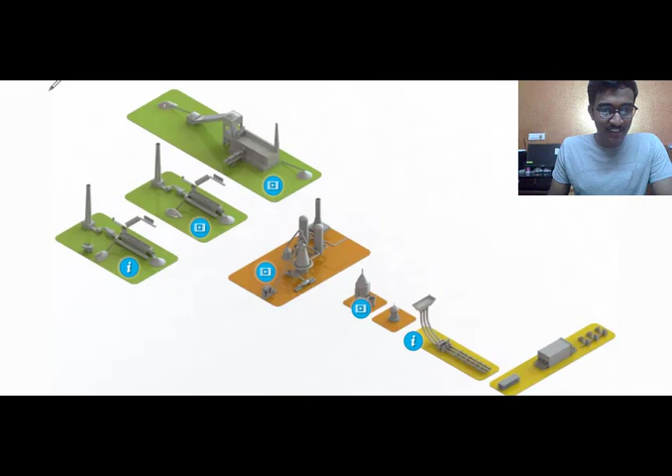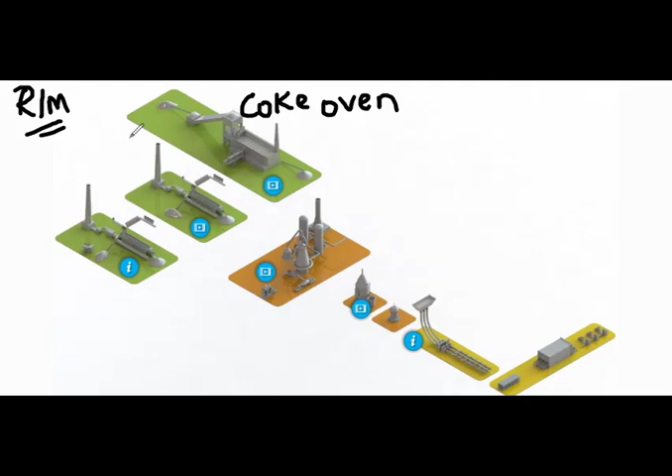Okay, it's an introduction, so let us go ahead. There will be raw material here, which will take coal, and the coal will be given to coke-oven batteries. Here we will have coke-oven batteries and mechanism, and here there will be fines. Fines can be converted as sinters and pellets. So this area is going to be sinter plant, and this is going to be pellet plant.

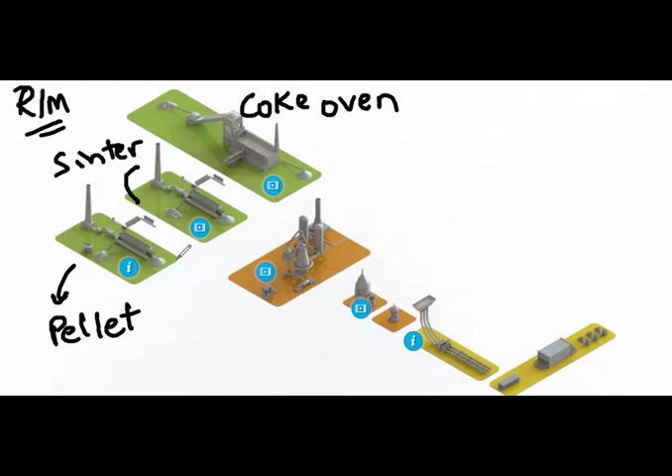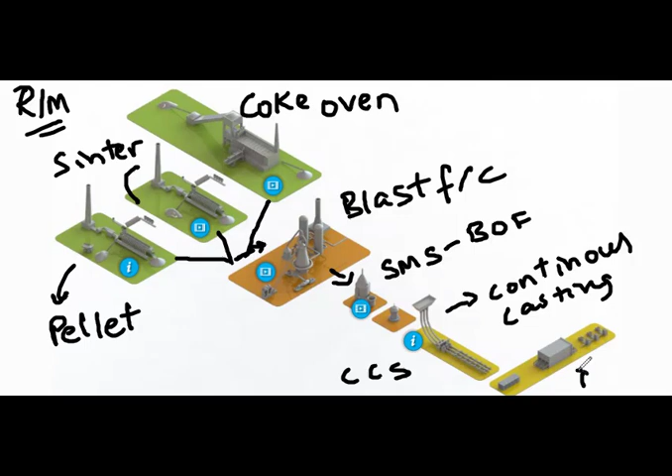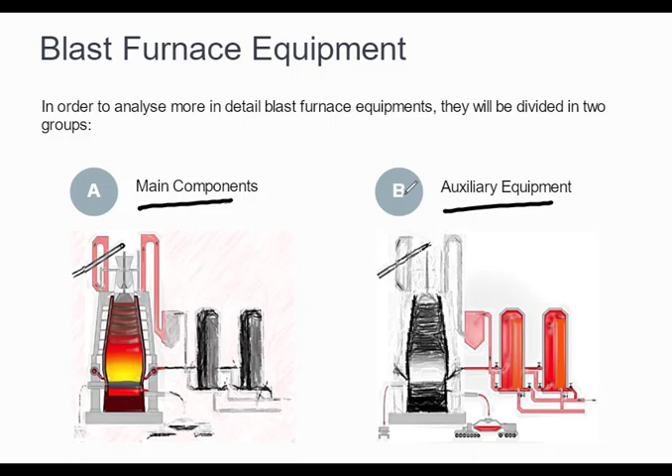So now let's learn on equipment. Equipment is classified mainly into two types: one is main components, and another is auxiliary components, auxiliary equipment. Main components are the ones which are in the interior, and the auxiliary equipment are the ones outside the blast furnace. Now let us see the blast furnace main components.

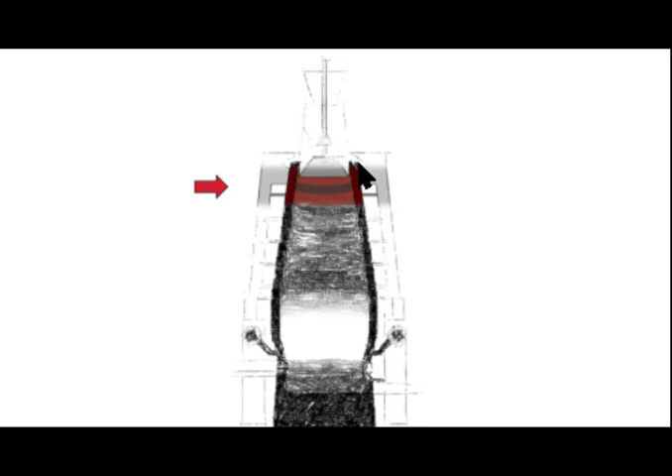We're going to see from the throat till the charging system. This is the throat region, where there is an opening from the top where the feed enters, and this is the shaft region. The shaft temperature is around 400 to 1000 degrees centigrade, and coming a little down it's called the belly region.

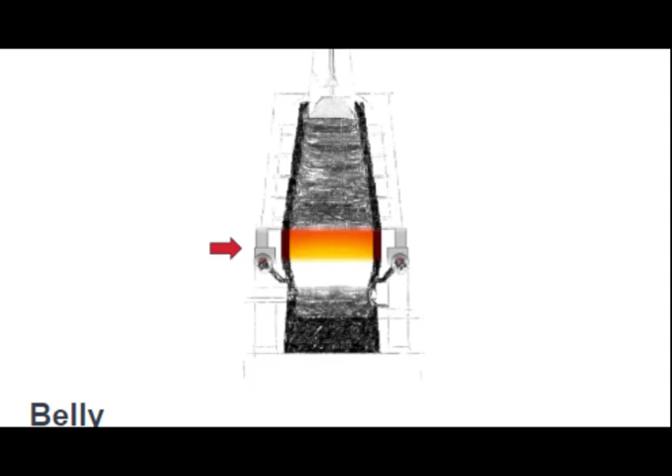The belly is shaped like a straight cylinder, so we cover it with high quality fire clay bricks, and the temperature range is around 1000 to 1200 degrees centigrade. And this is the bosh region.

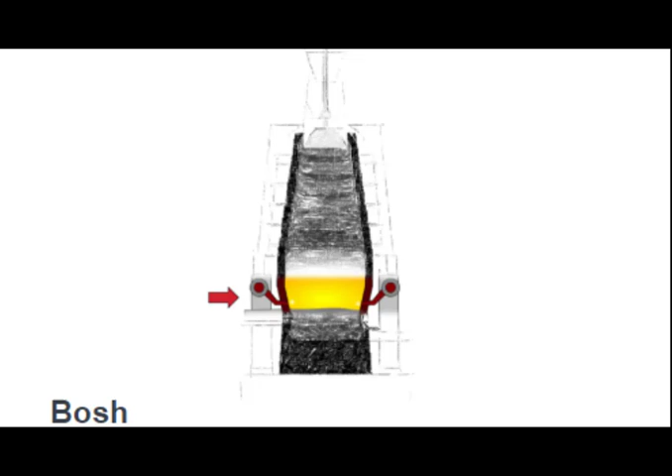The bosh tapers inwards toward its bottom, and it is located immediately under the belly. It is usually lined with high fire clay brick, and the temperature is around 1100 to 1450 degrees centigrade. The region we are seeing here is the hearth region.

The hearth is at the bottom of the furnace, consisting of molten iron with a layer of slag on top. Also, the hearth is lined with heavy fire clay brick and carbon type refractory brick.

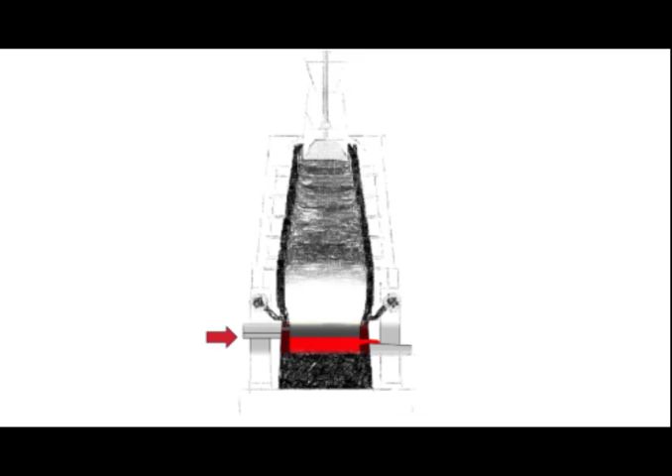This is called the bustle pipe, where the task of this system is to provide the tuyeres with hot air. What we see here is a tuyere. Depending on the size of the furnace, the side wall of the hearth is radially fitted with some 20 to 40 water cooled copper nozzles called tuyeres, which are used to inject the hot blast into the furnace from the hot stoves through the hot blast main and bustle pipes.

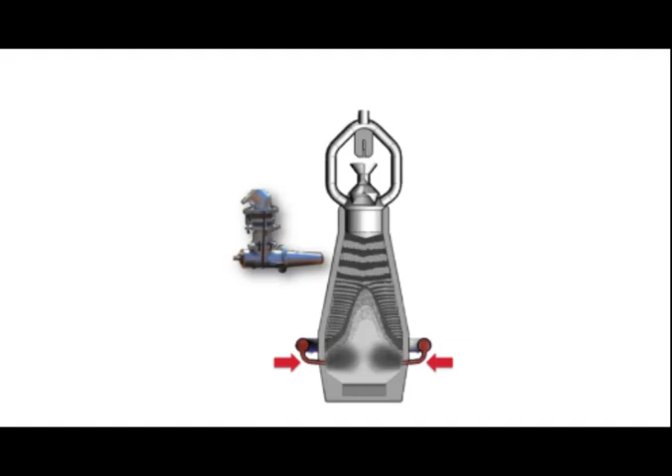Tap hole will be here. The tap hole helps in the molten metal being tapped through the tap hole, iron notch. A hole is drilled by the tap hole, so it's drilled here through the refractory clay plug, allowing liquid iron and slag to flow down through a skimmer opening, separating the iron and slag.

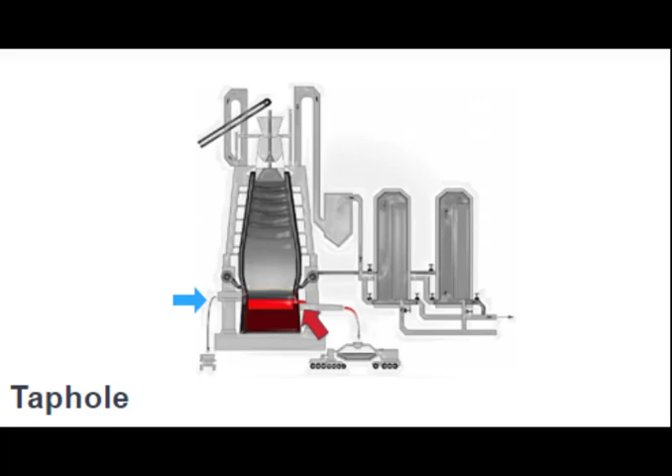Larger blast furnaces may have as many as 4 tap holes, so that could be here, here, here, here, and 2 cast houses. Once the pig iron and slag have been tapped, the tap hole is again plugged with refractory clay using a mud gun mass. This is how the tap hole works.

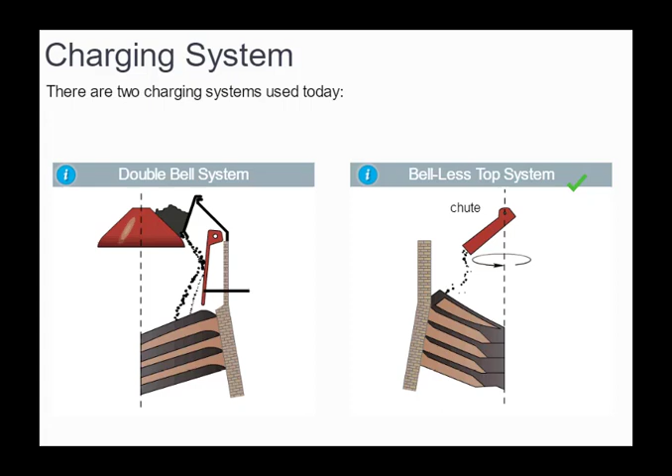So the two types of charging system: one is the double bell charging system, and the other is the bellless top system. The double bell system, used in old days, engineers used to charge raw materials in the blast furnace through two stages of conical bells, which seal the gases and distribute the raw materials evenly around the circumference of the furnace throat. It is literally hard because if we want to distribute the raw materials evenly, it is difficult.

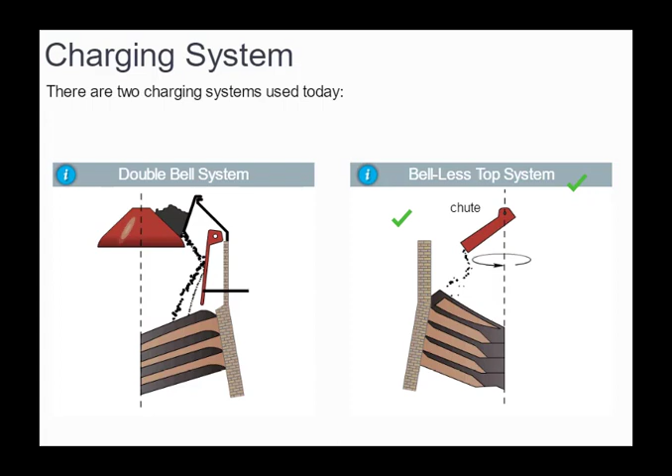So nowadays we are using the bellless top system. It is really simple. The chute can be rotated 360 degrees. There's no need of bells, and it uses two to three airlock type hoppers that discharge raw materials onto the rotating chute, which can change angles, allowing more flexibility in precise material placement into the furnace.

So till now we saw the main components. Now we're going to see the auxiliary equipment. We will see belt conveyors, hoppers, PCI (pulverized coal injection), blowers for feeding the blast, the hot stove for heating the blast, the blast furnace top pressure recovery turbine, equipment for dust removal and recovery, and the chute region. Okay, let's go ahead.

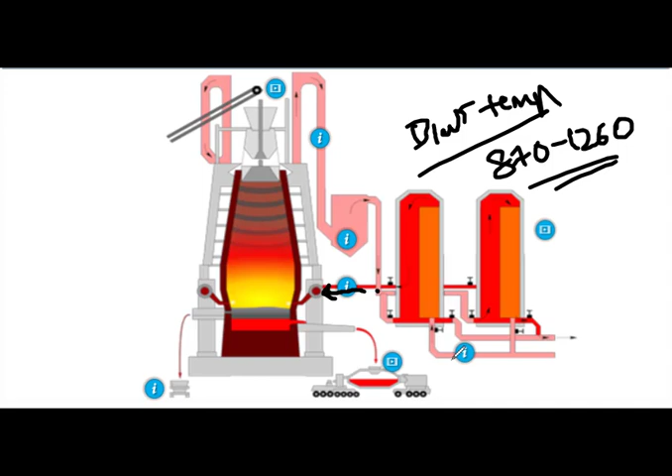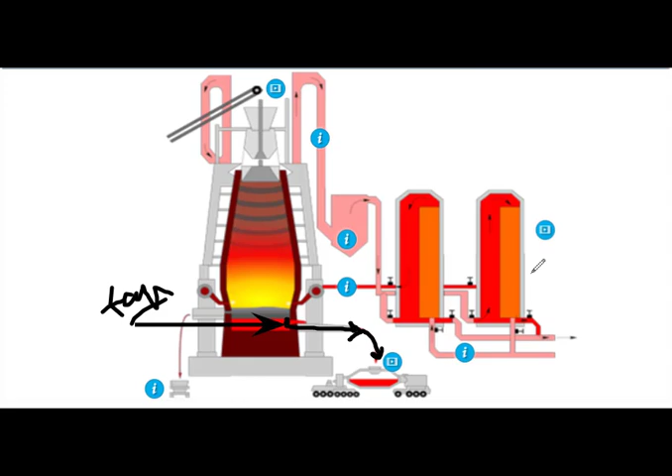The hot blast is sent, and finally there is what is called the tap hole. By the tap hole we have the hot metal which will be poured into the torpedo cars. The hot metal is conveyed into the torpedo cars, converted into torpedo ladles or cars.

These are positioned under the cast house waiting to be transported to the steel making plant, the BOF, for further processing. The torpedo cars commonly have a cylindrical shape with conical ends and are filled or emptied through an oval shaped opening. These torpedo cars are used so that there is least heat loss. On the left we have the slag.

So torpedo cars take the hot metal, and the slag car collects the slag for disposal. This is all about the entire process of the equipment processing, how it's going to work, and the entire auxiliary equipment. So let us see.

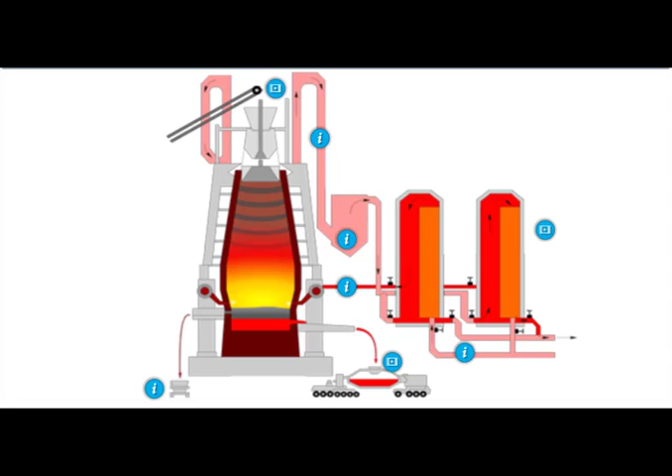Alright, so let us learn about this thing called the stove. As I said earlier, we're going to learn a little bit about stoves. The stove is first heated by burning gas and combustion air within the chambers and allowing the heat to be absorbed into the brickwork or checkerwork.

So we will have here brickwork or checkerwork. The checkerwork or brickwork will be heated, preheated. This mode is called the on-gas mode.

When sufficient heat has been absorbed, the stove is put on blast. In this mode, no combustion takes place, but the cold blast air is forced through the stove and absorbs the heat to become hot blast. This is then mixed with the cold blast to bring it to the right temperature.

As we see here, there will be cold blast from down at the bottom, which is forced into the blast furnace via the tuyeres. There will be the hot blast main, the bustle pipe, and the tuyeres here.

It is quite common to have three or four stoves, so that at any time one stove is on blast while the others are on gas. A boxed stove, or on-gas stove, has been heated up to temperature and sealed so that it is ready to go on blast.

So if one stove is down for repair, it is possible to use the other two or three. That's the reason we have almost three to four stoves. If one stove's checkerwork is to be repaired, we use the others. So this is how the stove works.

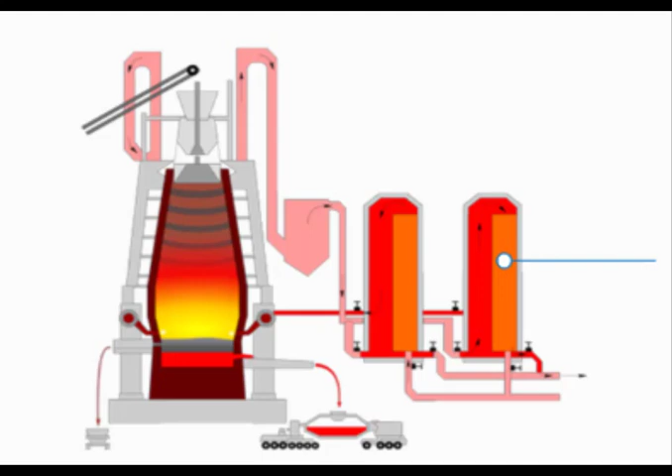So in this lecture we learned about the role of the blast furnace in the steelmaking process. In addition, we got a general idea of the blast furnace layout, and furthermore we were introduced to the different parts of the blast furnace, the main and auxiliary components.